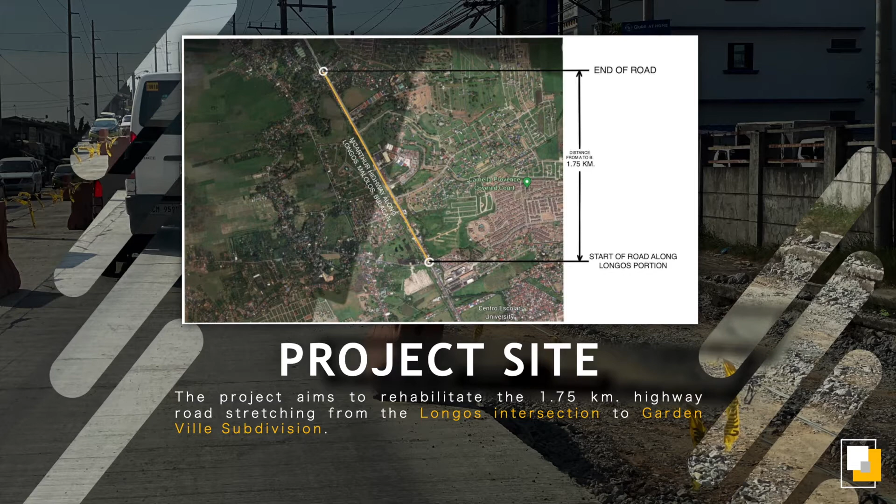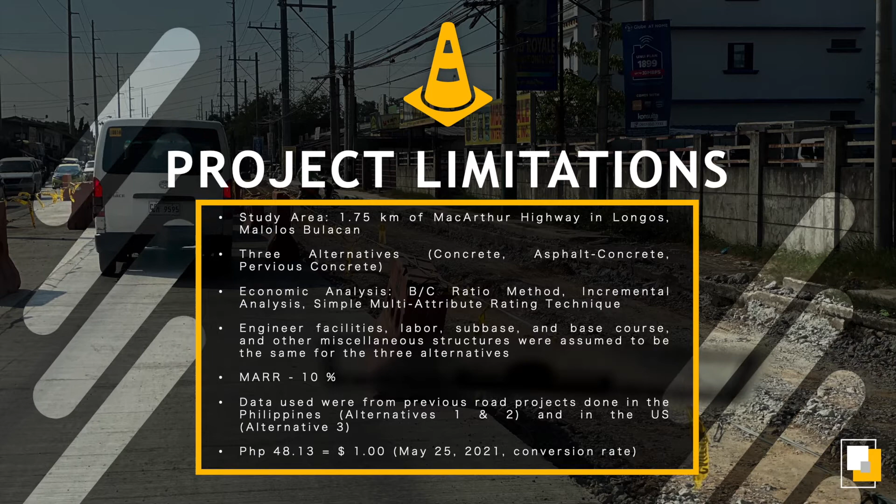This study only covers a total road distance of 1.75 kilometers and width of 13.4 of the MacArthur Highway from Longos intersection to Garden Ville subdivision. Listed in the slide are the project limitations. This study is only limited to the specified length of the MacArthur Highway. Economic analysis used to determine the best alternative were the benefit-cost ratio method, incremental analysis, and simple multi-attribute rating technique with assumptions as shown in the slide.

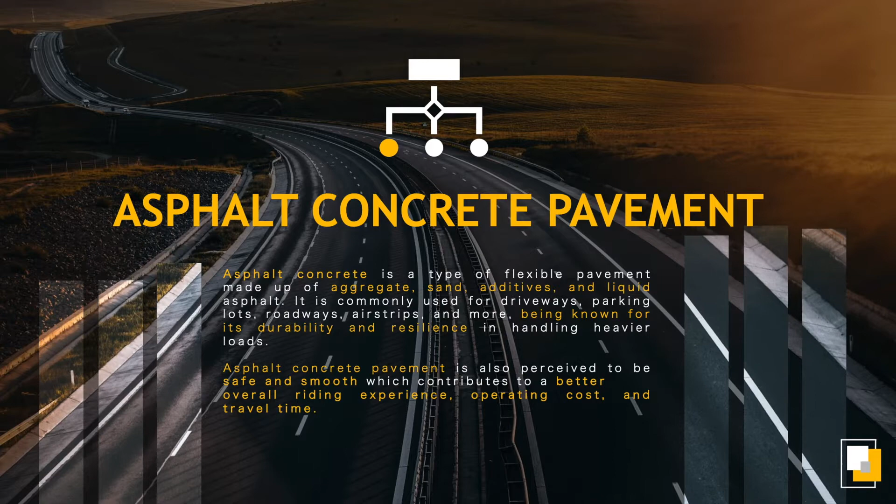To address the problem, 3 alternative pavements were proposed: asphalt concrete, concrete, and pervious concrete. Asphalt concrete is a type of flexible pavement made up of aggregate, sand, additives, and liquid asphalt. It is commonly used for driveways, parking lots, roadways, airstrips, and more, being known for its durability and resilience in handling heavier loads. Asphalt concrete pavement is also perceived to be safe and smooth, which contributes to a better overall riding experience, operating cost, and travel time. The design and pricing of materials for asphalt pavement was adapted from the Cavite-Laguna Expressway project under DPWH.

Concrete pavement is a type of pavement that is commonly used in the Philippines. It is known for its durable qualities and life expectancy of about 20 years. It only uses basic construction materials and it does not need frequent major maintenance throughout its lifetime. Even if the construction takes more time, money, and effort, with the right rebar supports and subgrade and sub-base course, concrete roads will be able to provide the service that is needed in an area.

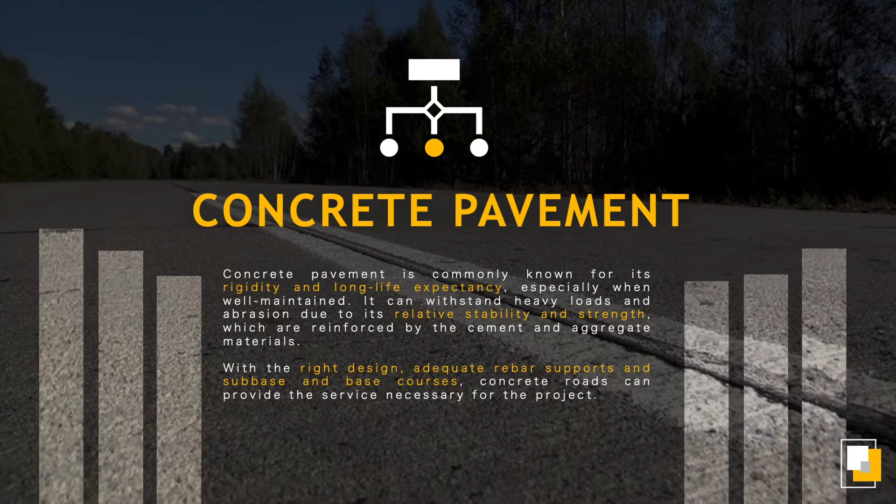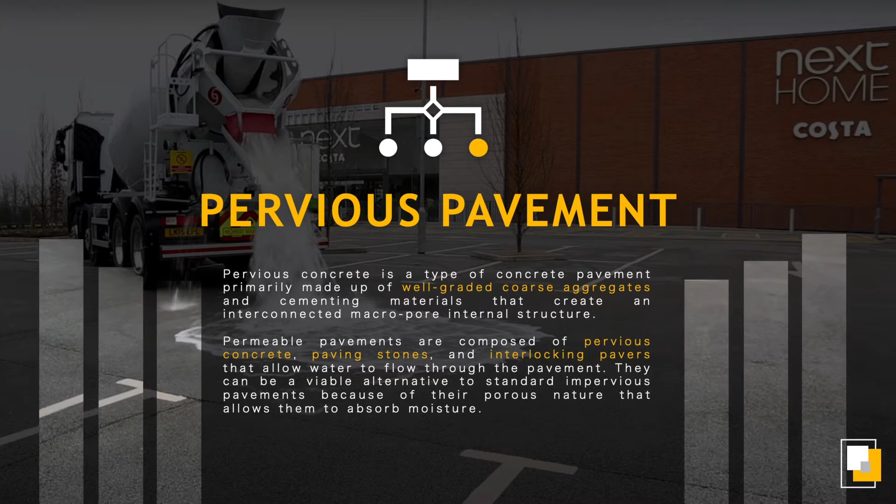Pervious concrete is a type of concrete pavement comprised mostly of well-graded coarse aggregates and cementing ingredients that form an interior macropore structure. Water can flow through permeable pavements, which are made up of pervious concrete, paving stones, and interlocking pavers. Because of their porous nature, they can be a viable alternative. However, due to having more coarse aggregates in their mix, this pavement tends to become weaker and less stable.

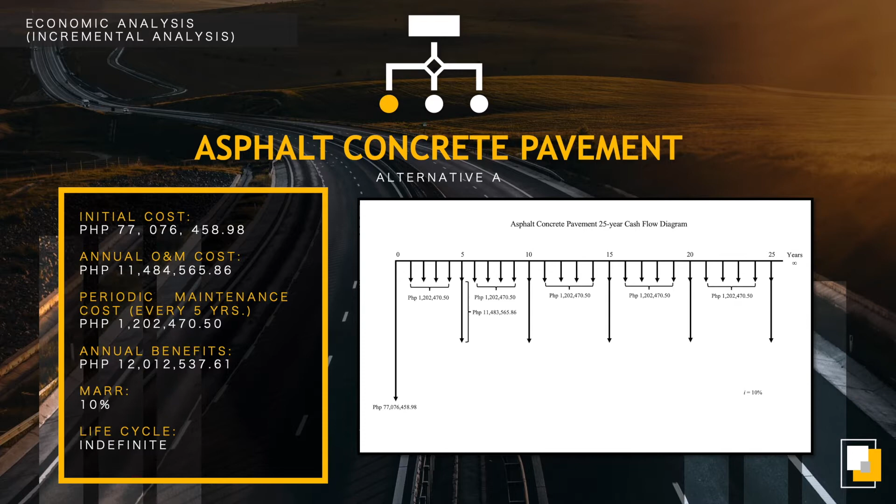To determine the best alternative economically, the alternatives were evaluated by cash flow development, cost analysis, incremental benefit cost analysis, and multi-criteria decision analysis. Following literature, it was determined that the initial cost totals to around 77 million pesos, annual maintenance costs to 11 million pesos, periodic maintenance every 5 years totals to 1.2 million, while the perceived economic benefits, which include annual pavement life extension, vehicle operating cost savings, travel time cost savings, and road accident prevention savings, amount to around 12 million per year. The present value was obtained with an interest rate of 10% and assuming infinite service life.

The benefit-cost ratio was obtained using the formula and discounted cost and benefits displayed, which results in a value greater than 1. Thus, the asphalt concrete pavement alternative is considered as economically viable.

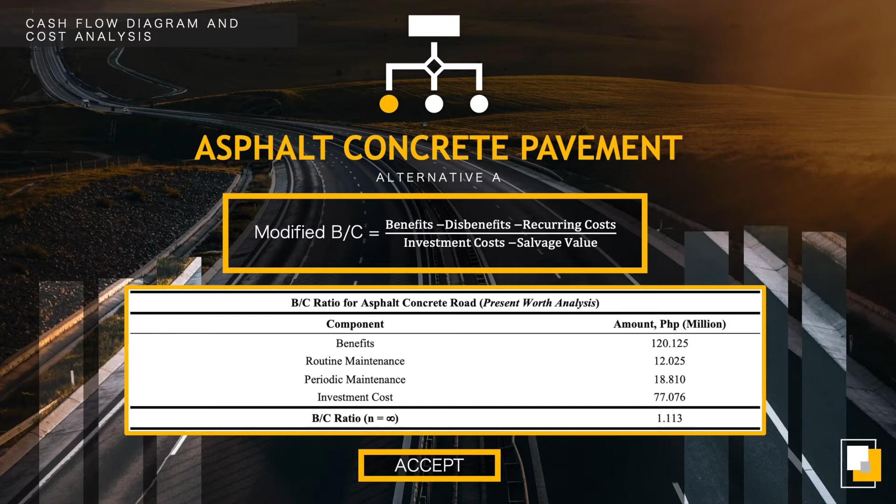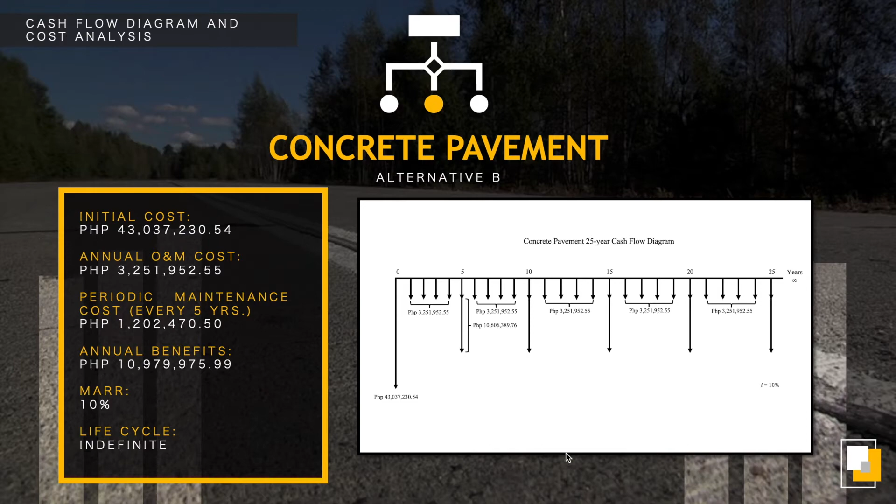All of these were analyzed with the MARR considered at 10% and an indefinite life cycle. Computing the benefit-cost ratio, we obtain a value of 1.182 with n as infinity. Since the value of B to C ratio is greater than 1, we can see that the alternative is workable.

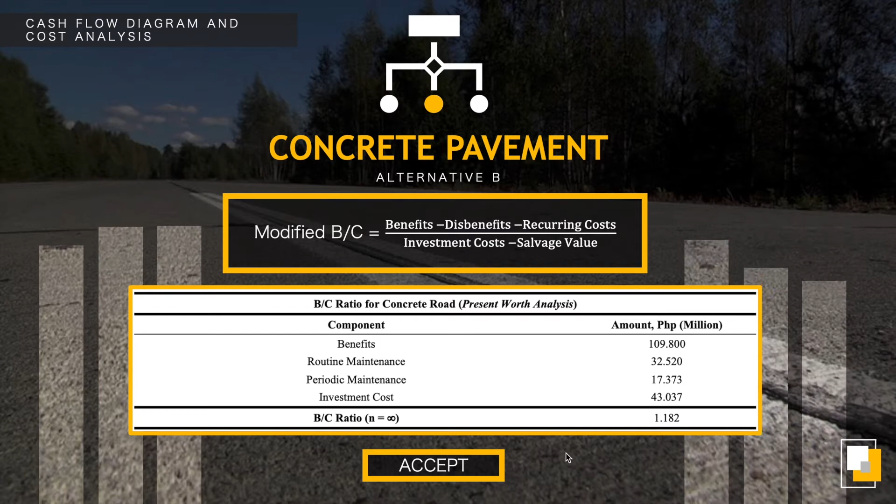The economic analysis of the students from UC Davis provided important details about the investment cost for the Pervious pavement. As shown, the initial cost is estimated to be around 87.2 million pesos. The yearly operations and management costs are about 4.7 million.

Every 5 years, there will be 195,000 in expenses for restoring the permeability of the pavers, while every 25 years, 4.5 million will be spent for refreshing the base course. Benefits are estimated to be 14.5 million annually.

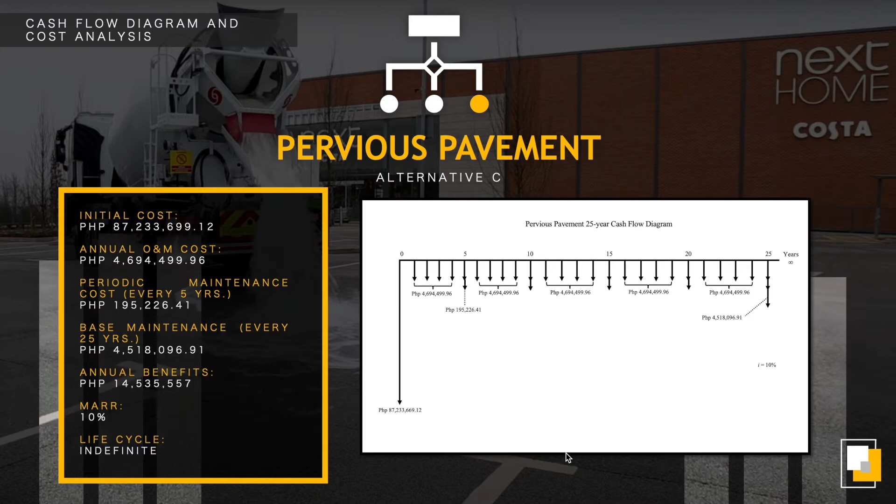Following the modified BC ratio analysis, the respective present worth values were obtained with 10% MARR value. Following the formula presented, the calculated BC ratio is 1.077, which signifies that the alternative is economically feasible.

Initial economic analysis proved the three pavement alternatives to be economically viable options. To determine the best alternative in terms of cost and benefits, incremental analysis with a study period of 25 years was used. Following the defender and challenger approach, with AC versus concrete first and Pervious versus concrete second, the concrete alternative was determined to be the best option as a material of the surface course for the pavement.

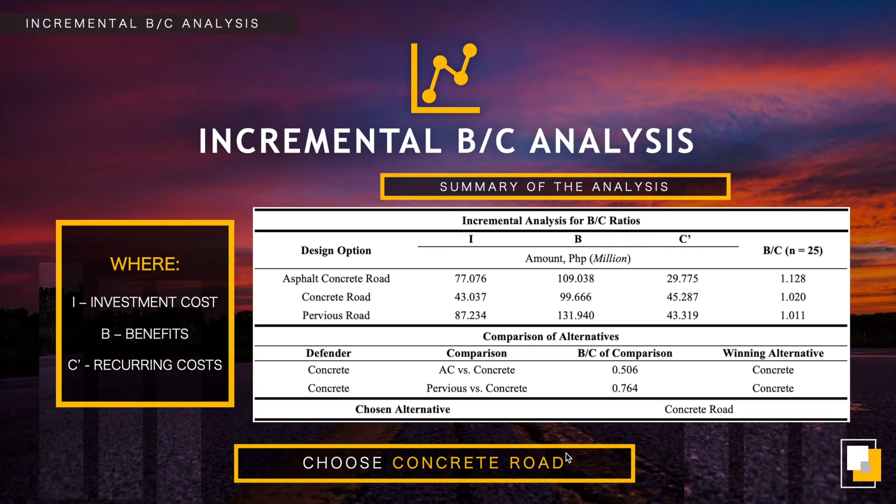In recognition of factors defining the best alternative based on the research interests that were not included in the economic analysis, the proponents established criteria, namely cost, safety, completion, and environment with a normalized weight of 60, 20, 10, and 10 respectively. Following economic analysis and previous studies comparing the three alternatives, each alternative was rated on a scale of 1 to 10 for each criterion.

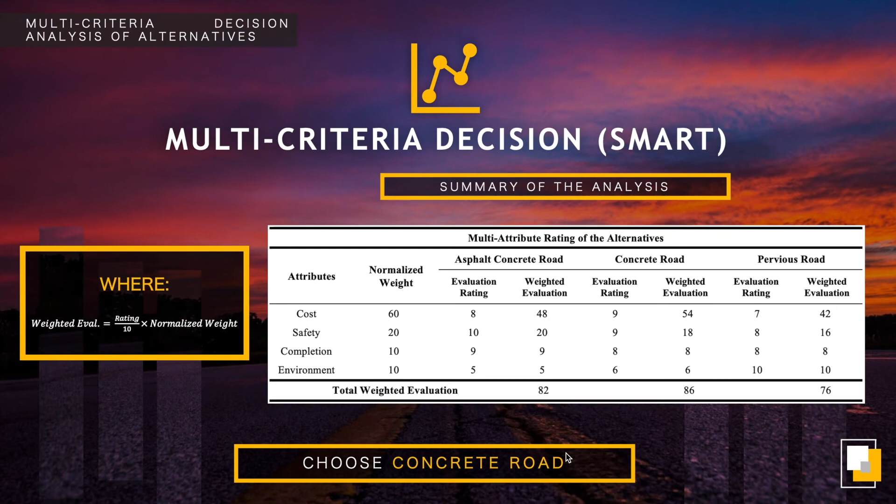The concrete pavement option obtained the highest rating for cost as proven by the economic analysis executed in this study. On the other hand, the asphalt concrete alternative got the highest rating for both safety and completion criterion because of its high skid resistance, durability, and construction process. Lastly, the Pervious concrete pavement option acquired the highest rating for environmental impact due to its design and effectiveness in mitigating flood and thermal pollution.

The three proposed pavement design alternatives were proven to be viable through economic analysis based on the estimated benefits and costs. Implementation of any of these alternatives will be advantageous for the reconstruction as the benefits outweigh the costs. This study, however, aims to find the best design alternative.

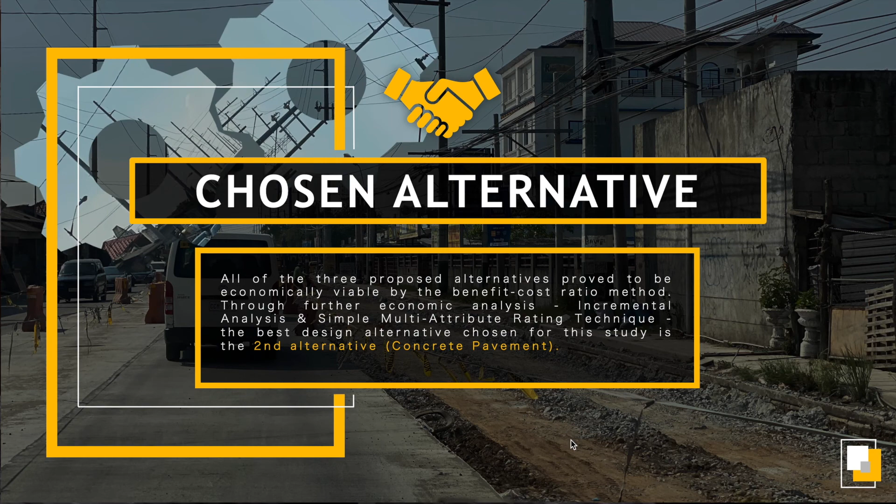By utilizing incremental analysis and simple multi-attribute rating technique, the three proposed alternatives were compared, and it was determined that the most economically efficient design is with the use of concrete pavement. This agrees with the fact that concrete is the most commonly used pavement type in the Philippines.

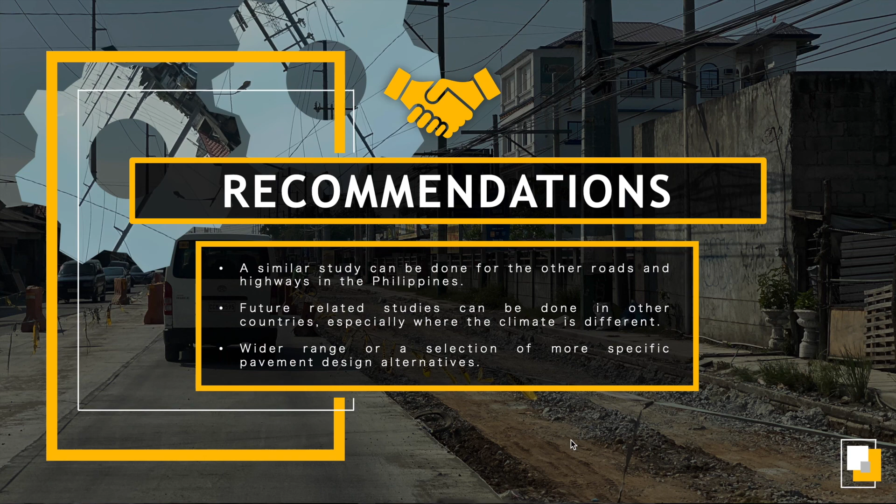As stated in the scope and limitations, this study only covers a specified length of the MacArthur Highway in Longos, Malolos, Bulacan. Future related studies can be done in other countries, especially where the climate is different. One disadvantage of the concrete pavement is its vulnerability to the freeze-thaw cycle, which is only considered in countries that experience winter seasons. Furthermore, a wider range or a selection of more specific pavement design alternatives may be used in future studies for the purpose of developing new and improved pavement designs which may be economically viable.

That concludes our presentation for the proposed project entitled Road Rehabilitation of the MacArthur Highway along Longos, City of Malolos, Bulacan. Thank you for listening.